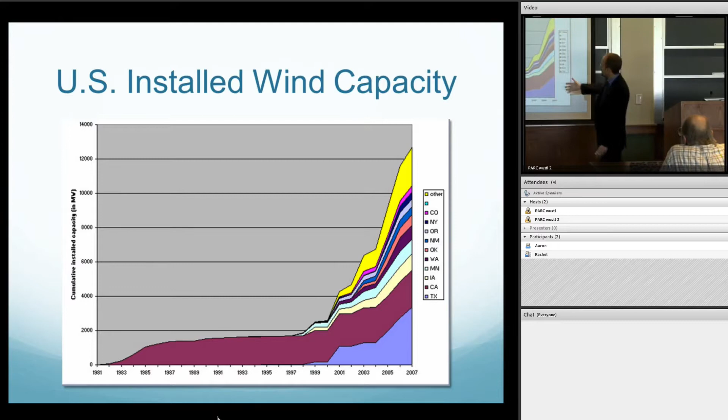We can break this out by where this power is being installed. The biggest portion of it up through 2007 actually came in Texas. This part before was mostly in California due to some subsidies in the 80s. There was a large installed base there. But a lot of the growth has come from Texas and then from various other places, mainly in the Midwest.

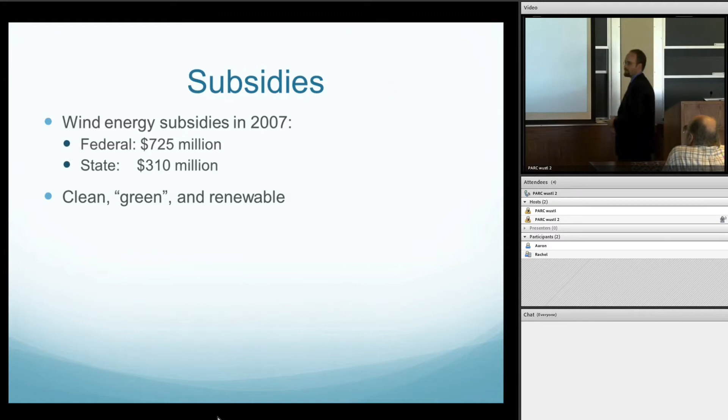Okay, so why have we had this growth? This is the question I first asked myself when I was a graduate student. I'm like, what's going on here? Why are we having this tremendous growth? It turns out that the answer is fairly simple. It's because we're paying people to put wind power in. We give them subsidies. In 2007, there was over $1 billion spent in wind energy subsidies alone. Why do we subsidize it? Because it's clean, green, and renewable. We like all of those things. To be more specific, it emits none of the traditional pollutants that we see from gas and coal-fired power plants like NOx, SO2, and carbon dioxide.

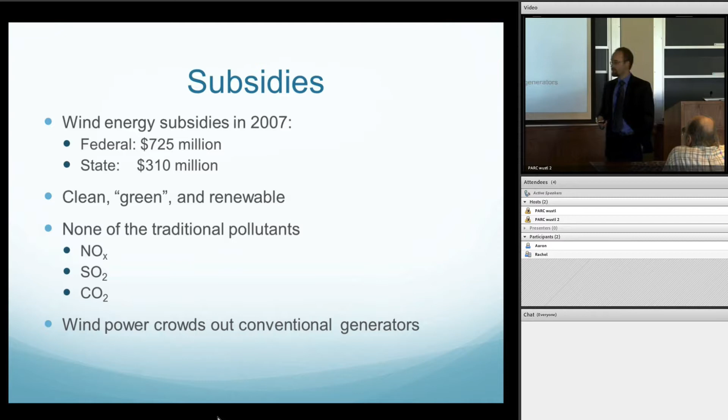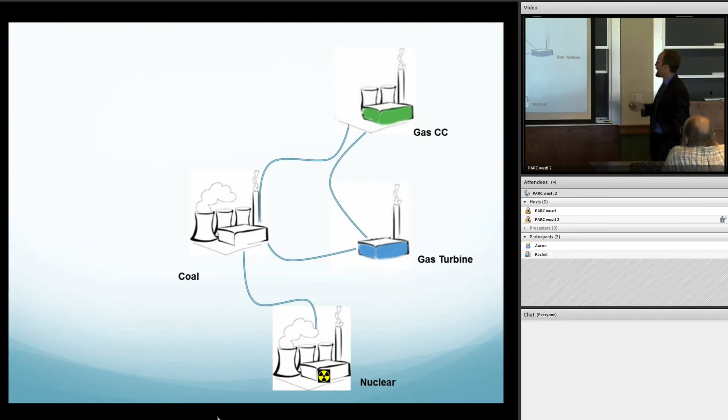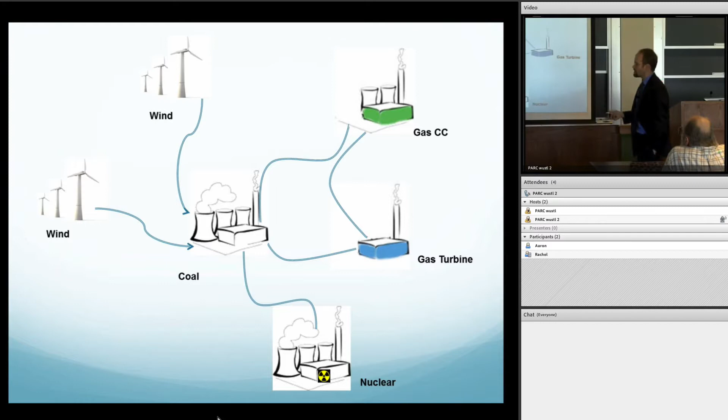And the idea is if we subsidize wind power, then other generators will have to produce less electricity. Right? In some sense, wind power is going to crowd out production from other energy sources. So suppose that we have a grid with different power producers on the grid. We have coal plants, we have gas turbines, we have gas combined cycle, we have nuclear. The idea is that wind is going to be built. It's going to produce electricity at certain times of the day that will flow over the electricity grid. Other types of generators will reduce their production.

Now, it turns out that these different types of generators have very different emissions profiles. For example, you take a coal plant, it emits over a ton of carbon dioxide for every megawatt hour of electricity it produces. It also emits significant amounts of sulfur dioxide and NOx. You compare that to a gas combined cycle generator where you have less than a ton of carbon dioxide per megawatt hour, very little sulfur dioxide, and also much less NOx being emitted. Then you have other types of gas turbines, which are somewhere in the middle. Here, this one is about 1,500 pounds per megawatt hour.

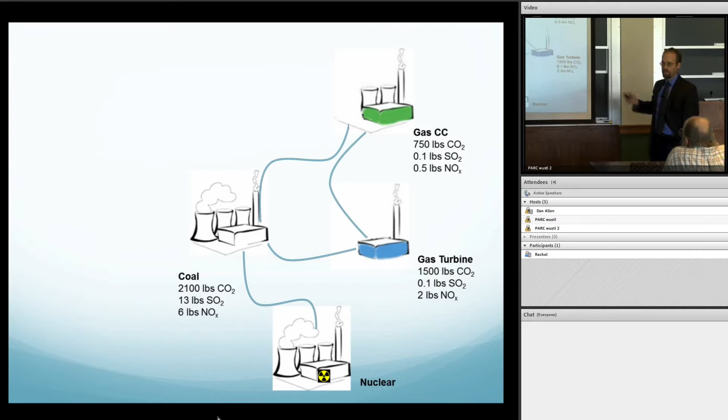Then, of course, you also have nuclear, which has its own set of environmental issues. But for the most part, and I'll explain a little bit later why, we're not going to be focusing on nuclear, primarily because it just doesn't respond to wind when wind produces electricity. It's not crowded out. Because the idea is we want to tell which of these generators are being crowded out. But we want to know what is the distribution of offsets in terms of electricity across these types of generators, because this is what will determine the environmental benefits of wind power.

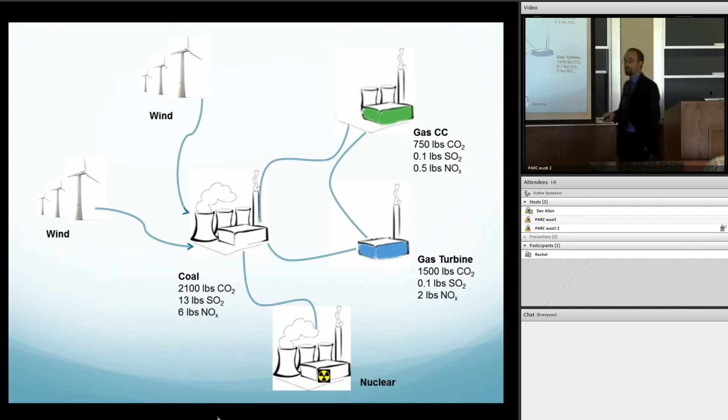This is the objective, to answer this question. What do subsidies buy environmentally? If we're spent... Yes. And if I don't, come back to me in a minute, okay?

So the question is, what do subsidies buy environmentally? If we're spending $1 billion a year on subsidies, I hope that we're getting something for it. So in particular, I want to look at the quantity of emissions offset by wind power. And also, I want to look at the value of those emissions. How valuable are those emissions that are offset? And this is going to depend on these generator-specific substitution parameters, or which generators ramp down their production when wind power comes online. That's a very short-run effect.

So if it's a windy day, there's lots of wind coming into the electricity grid, some generators are going to produce less electricity than they would have absent any wind power. So that's a short-run effect. There's also a long-run effect. So if I have a gigawatt of installed wind power, people may install different types of generators on the grid, or certain generators may enter or exit.

In this presentation today, I'm going to be focusing on the short-run effects. So given the landscape of the generators as they are, you introduce wind power, how are they going to change their production patterns? So the long-run question is very interesting, and perhaps more important for policy considerations than the short-run effect. But it's not going to be the focus of today's work. That's something I'm working on in the future.

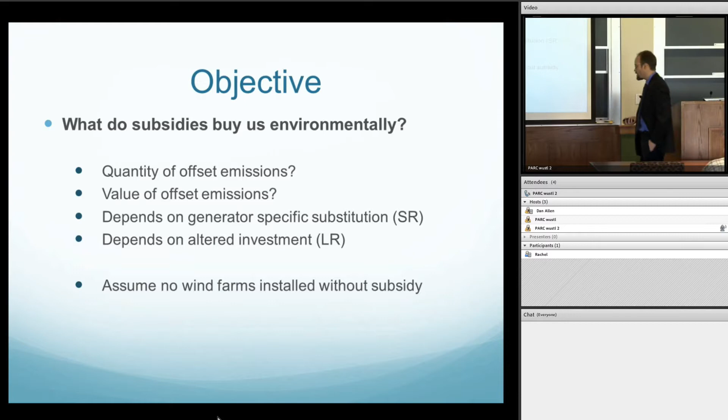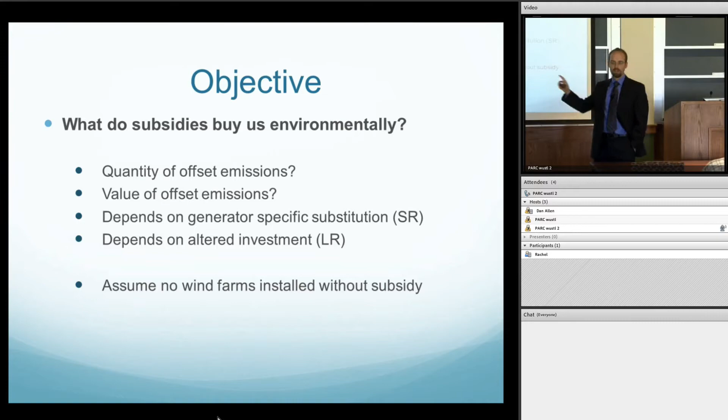Okay. So we're going to make an assumption here throughout the talk, and that is that we would have no wind farms without a subsidy. So if you were to take the subsidy to zero, or if we had never had a subsidy, you would see no new installed wind power aside from the wind power that was installed in the 1980s. So the subsidy that I'm looking at is the federal production tax credit, and that kicked in in 1992. That's the particular policy I'm looking at. So the subsidies for California that induced those investments are already gone. So I'm not looking at that particular question.

So wind power is very capital intensive. You spend all your money up front. You spend $1 million for a megawatt turbine. And after that, it's very low marginal cost. You have to pay maybe some leasing fees on land. You have to pay for maintenance. But as far as generators go, very, very low marginal cost because your fuel is free once you install it. Subsidies come in both federal and state flavors.

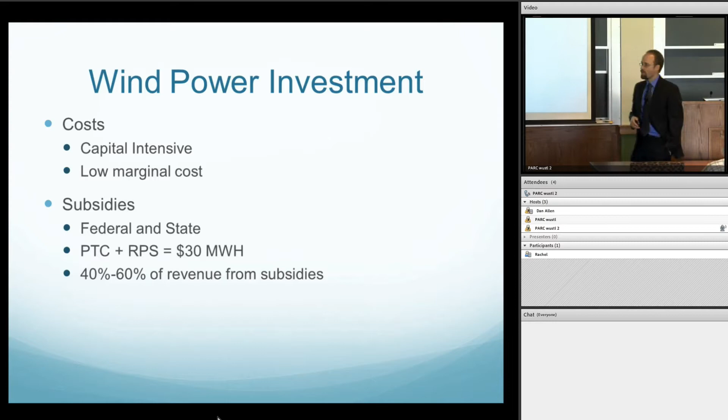So the federal flavor is the PTC, or production tax credit. And depending on the state, there may also be an RPS, a renewable portfolio standard. Those usually are paid out in some kind of environmental credit or renewable energy certificate. And between those two, for example, in the market that I'm looking at, Texas in this particular study, it's about $30 a megawatt hour that they're getting from subsidies.

So they get whatever they sell the electricity for, and then they get this $30 per megawatt hour payment. And it depends on how much they produce. So it's not an upfront subsidy. When you produce a unit of electricity, you get the subsidy. Right, so 40 to 60% of their revenue is coming from subsidies. So these subsidies are very, very important for their bottom line.

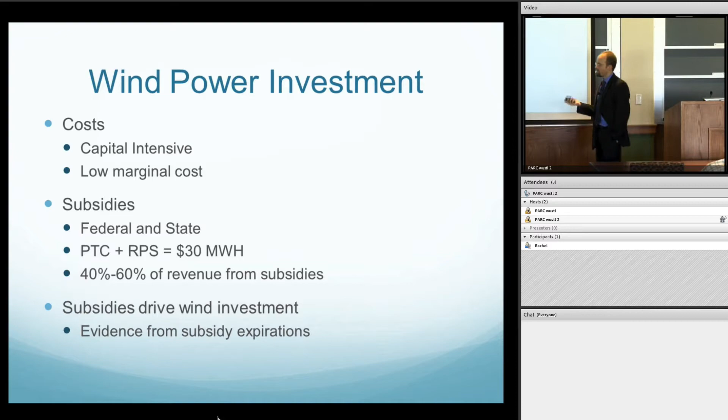And they're really driving wind investment, and you can see this from subsidy expirations. So here in 1999, we have our first spike in wind power. It turns out in the year 2000, those subsidies expired. So investment in new wind power plants dropped to almost zero. In 2001, those subsidies were reinstated retroactively.

So an important aspect of this is actually the production tax credit, not the renewable portfolio standards. The production tax credit accounts for about 2/3 of that $30 subsidy that I was showing earlier. Yep. Yes. Yes. Mm-hmm.

So it constitutes 40 to 60% of the revenue, right? So it's a really big part. It's no wonder that no one decided to invest here, and that people did decide to invest here.

An important aspect of the production tax credit is that once you receive the tax credit, you get it for 10 years. So there's no uncertainty. It's not like, well, I'm going to install this year and maybe I won't get the tax credit next year. It doesn't work that way. As long as the tax credit is active when I build my turbine, I get the tax credit for 10 years.

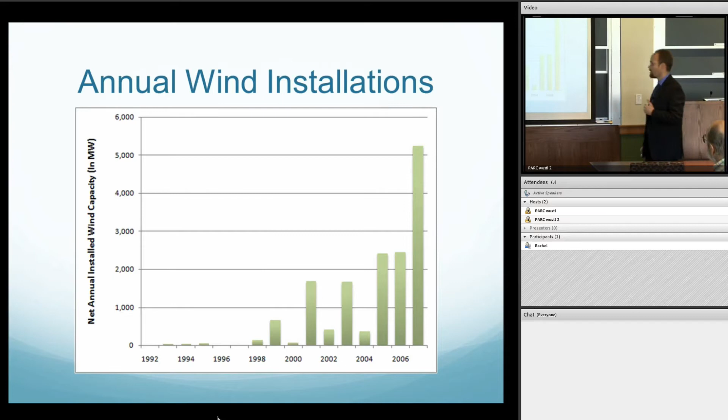Okay, so there's a number of ways we could approach looking at these short-run substitutions I was talking about. We could use an engineering model that's completely static. Some of the characteristics we want to incorporate, though, are dynamics. If I start up a generator in the morning, you have very short-run dynamics. It costs me something to start it up, and I may not want to shut it down again for a certain period of time. We also want to include location issues. If I'm close to wind power, maybe that affects me more than if I'm further away, depending on the configuration of the grid and where there is congestion. So I want to take into account location.

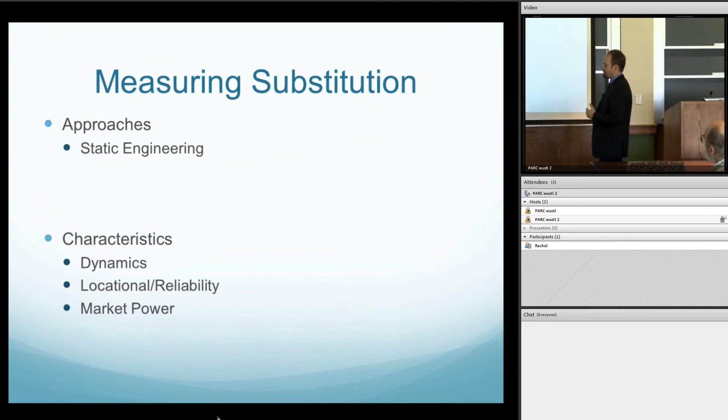We also want to take into account market power. This is important given the way that many markets have been restructured. If certain firms can exercise market power, we want to account for that. By market power, what I mean is that they're not pricing at cost. They're including some markup above their cost.

So another approach is to use an engineering model that incorporates dynamics. This will account for locational issues and dynamics, but not market power. What I'm going to be doing is taking an econometric approach, which accounts for dynamics, location, and market power. All three of those.

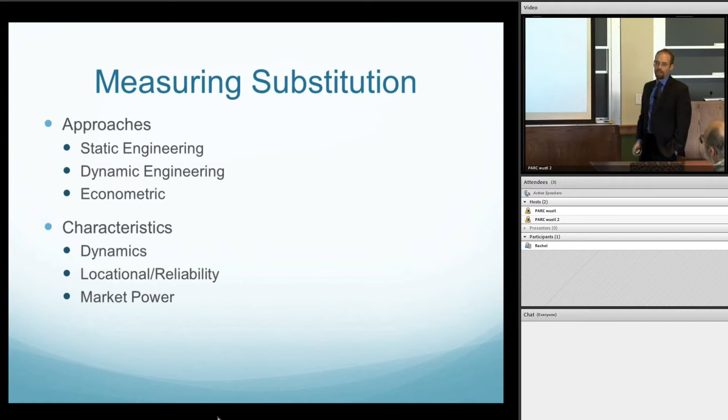And so the approach is to take quasi-experimental variation in the amount of electricity produced by wind turbines. This is just driven by weather. On a windy day, they can produce a lot of electricity. On a day that's not windy, they can't. And I'm using very fine scale data on generator output. I have wind output every 15 minutes, and I also have the output of every generator in the market every 15 minutes.

So this is going to allow me to identify generator-specific substitution patterns. So let me take a generator in West Texas that burns gas. It was built in the 1970s. It uses gas to produce steam to drive a turbine. Right? So what I'm going to actually get is a generator-specific substitution coefficient.

For every additional megawatt hour of wind power produced, on average, how much does this generator reduce its production? So it's very specific to each generator. In that sense, it's very, very flexible. There's no aggregation going on here. Right, so once I know which generators reduce their production when wind power comes online, then I'm going to use

EPA generator profiles. So the EPA tracks emissions from generators, and they can tell you what their emissions rate is. How much sulfur dioxide do they produce per megawatt hour? How much carbon dioxide do they produce per megawatt hour? How much NOx do they produce per megawatt hour? And I'm going to apply these generator profiles to the substitution coefficients I'm going to estimate to get offset emissions.

Sure. Yes. Yeah. Mm-hmm. Mm-hmm. Yes. Which people are you talking about?

Okay, so let's suppose I'm a generator that burns coal, and wind power increases. So what actually happens in this market? Well, the price of electricity drops. So there's a real-time market every 15 minutes. So wind power starts increasing. It may be anticipated. It may not be anticipated. That's sort of up for debate, how much of it's anticipated versus not.

So the price drops. And the price will continue to drop until some generator on the grid decides it's worth it for me to reduce my production. Now, maybe I contracted to provide electricity to someone else, but now the price is below my cost of production. So I can lower my production, buy power on the spot market to meet my contracts, and earn more money than if I had been producing electricity myself. So that's the mechanism by which this happens.

There is an explicit price process, right? And you'll see actually in Texas that these prices, not so much in the data I'm looking at from 2005 to 2007, but particularly in 2008, you have prices being very, very low in high production time periods for wind. We're talking negative, right? So the price is below zero. Now, why would the price be below zero? Very odd, right? And the reason is because they're getting this subsidy.

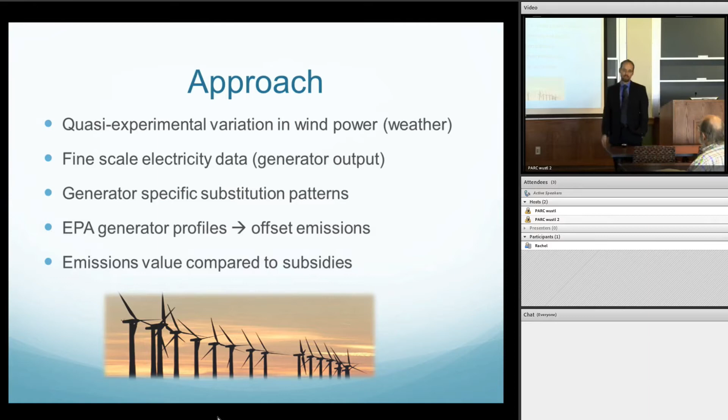Okay, so at least when I started this, and there's been much more work since, there's actually little empirical research on quantifying offsets. So there were quite a few engineering simulations, like should we build another gigawatt of wind power on our grid? What implications is that going to have for things like reliability? And they used engineering models to do that. They're very good at looking at things like reliability. And in the process, they're like, well, we can tell you what the emissions change will be.

This paper, on the other hand, actually uses data on operations to measure the environmental offsets. Right? So I'm actually looking at a grid with operating wind farms, and I'm using the actual observed behavior for generators in the market. And actually, this has spurred follow-up papers by Kaffine and Novan. They look at other grids in the United States. Like I said, I'm looking at the Texas electricity grid.

And they also answer slightly different questions, looking at, for example, heterogeneity by time of day. The parameter estimates I'm going to be showing you are on average, right? But we might care about when these emission offsets happen in the course of a day or in the course of a season or by level of demand, right? And so that's what these other papers do.

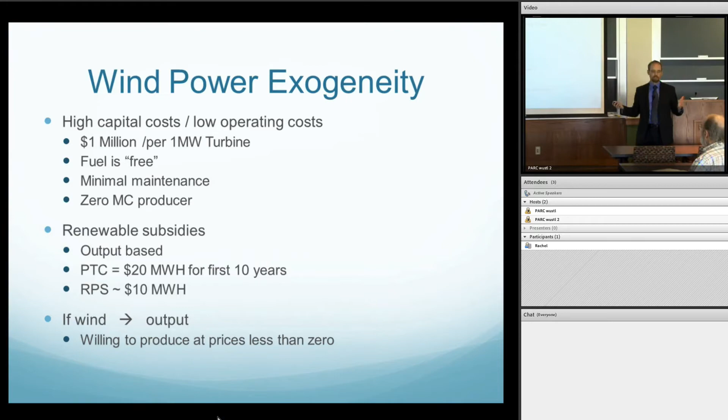And the result is whenever the wind is blowing, these guys are trying to milk every last ounce of energy they can out of wind power, with the exception of times when price is very, very, very low, and they're like, okay, it's minus $40 a megawatt hour, we're going to ramp back production. Or there may be certain events, like when you have a hurricane or something, you just have to turn it off. There's nothing you can do about it.

Okay, so we might think of an experimental model. Since this is exogenous, it is highly variable, where we just have the quantity production from a given generator on the left-hand side, and then wind on the right-hand side. This is a very, very simple model, right? But the problem is that this isn't an experiment. It's quasi-experimental in that wind is not completely random. So it follows some patterns.

Also, this is not unique to Texas, but pretty much all through what they call the wind belt, which is the Midwest in the U.S. We have this kind of production pattern. This is very common for actually any land-based wind farm. Offshore wind farms are different. They have a production pattern that's more similar to demand.

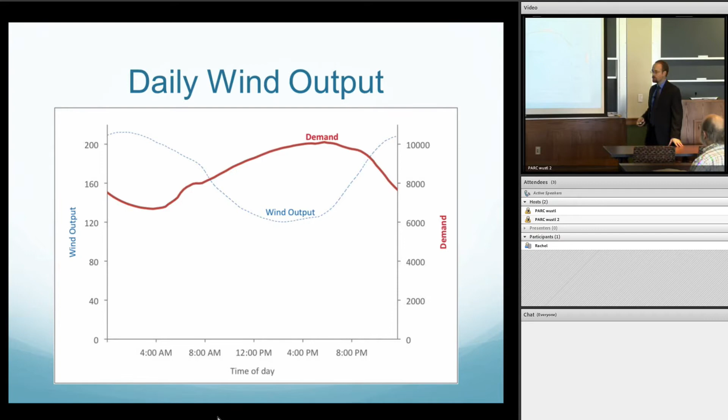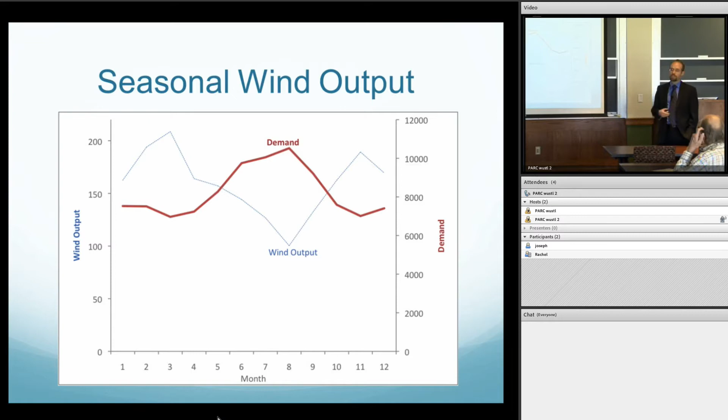Okay. But it doesn't stop there. We also have seasonal variations. So wind produces most of its power in the spring and in the fall, which is exactly when we don't have high demand. We have high demand in the summer and in the winter. In this case, for Texas, it's particularly in the summer because it's a lot of air conditioning. But that's true throughout the US. The peak demand times are always in the summer because even in Minnesota, they use air conditioning.

So the grid I'm going to be looking at is the Texas Interconnection. It's been a restructured market since 2001. There's about 22 million people here. It has a relatively large share of wind power. So in 2007, 5% of its capacity was wind, which for the US is quite high.

So the data I have is generator output every 15 minutes. So I have 332 generators I'm looking at, plus the wind farms. I have it for 2 years. I also have DC ties. These are the transmission of electricity outside the grid. So I do see how much electricity goes outside the grid. I just don't know what it does once it leaves or where it comes from if it comes in.

There's 2 DC ties. One is to the Southwest Power Pool, and one is, I forget the name of it, but it's the southern grid. So it is point to point. It's just transferring power between it and another interconnection.

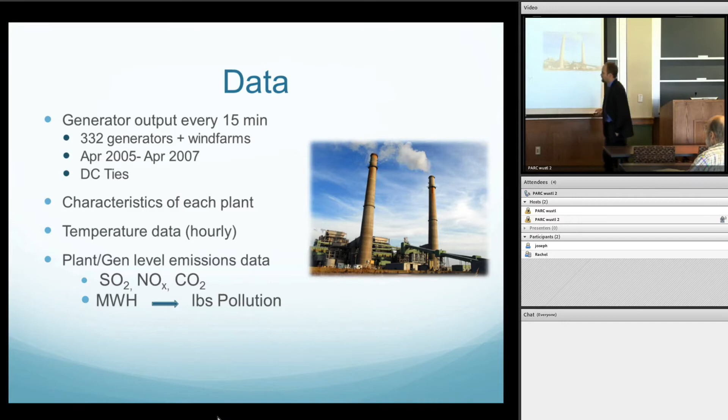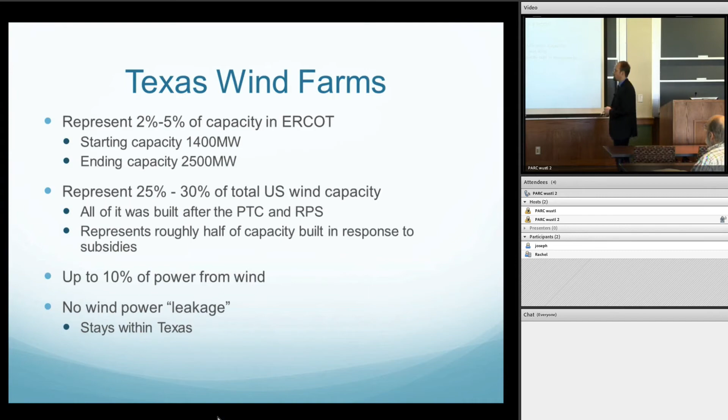Okay. So interestingly, this change in capacity in ERCOT represents 25 to 30% of the total US wind capacity built over this period. So even though I'm looking at Texas, let me rephrase that. It represents roughly half of the capacity built in response to subsidies, which is 25 to 30% of total US wind capacity. So Texas is a huge player in wind in the US. So at any given time, up to 10% of power on the grid is coming from wind. Now that's even more, and it all stays within Texas.

I'm going to kind of go through this quickly. Many of you probably are not worried about this, but economists worry about demand and supply, what's endogenous, what's exogenous, what's determining what. And in electricity, the demand for electricity is actually not determined by wholesale prices. That's because consumers like you and I, and even to a large extent industrial users, are not exposed to wholesale prices in real time, right? So I get some price, maybe it's a price for the month, maybe my price changes every month, that's fine. But for that given month, I have no incentive to increase my consumption when prices are low or decrease it when prices are high. I just face some constant price.

So I'm modeling demand as a function of shocks, Z. So this might be the weather, it might be when I wake up, it might be when I go to bed, and of some constant price that doesn't depend on T, my 15-minute time period.

So the wind is going to affect output through the price, as we mentioned before. I'm not going to model the price component of this. Rather, I'm going to use a reduced form model to look at the impact of wind on emissions or on output directly. So I could go wind on prices, prices on output. But instead, it's more efficient to go directly from wind to output. And I'm going to exploit the exogeneity of wind power to do that: the fact that they don't have control over their available fuel, they're a low-cost producer, and they cannot store their fuel or their output.

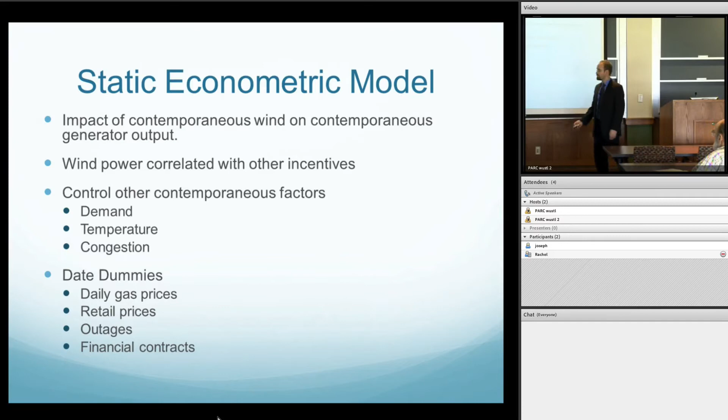Okay, so this is what the estimating equation would look like. I have quantity on the left-hand side. I have wind and wind squared. It's just a simple polynomial expansion of wind to allow for nonlinearities, which I think may be in the model. You have z, which are all those controls like demand and temperature, and then you have the date dummies. And there's going to be a separate regression for each generator on the grid.

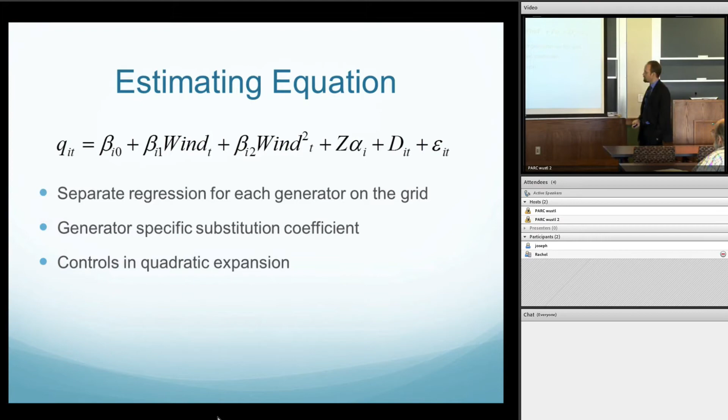So I had 332 generators. That's 332 regressions I'm going to be running. And I'm going to get generator-specific substitution coefficients, which are the beta 1 and the beta 2 in my model. And I also do a quadratic expansion for the controls to allow for nonlinearities there. This is a nonlinear system. Okay, this is the estimation. Not that interesting. Okay, so these are the results from a static model.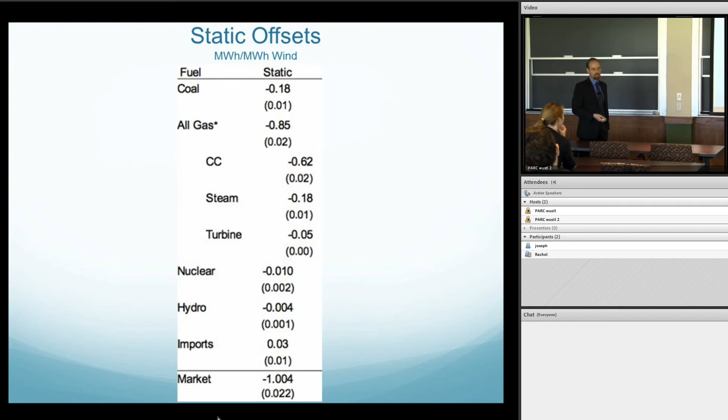So the basic idea is I do want to allow for some nonlinearity. I also want a fairly parsimonious specification so that the interpretation of the coefficients is straightforward. I don't see any theoretical reason why you could rule out, for example, having more polynomials in there. Could, yeah.

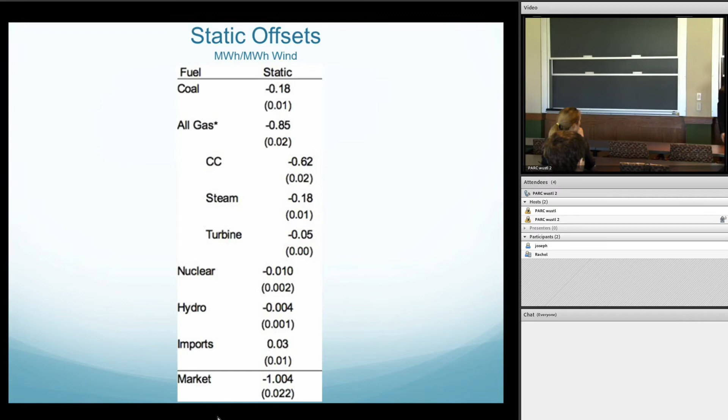Okay, so if we just look at the static model, and by static, I mean that it's just the output right now and the wind power right now that matters in this time period. You see that coal actually accounts for a large fraction of the substitution. For every megawatt hour of wind, about 0.18 of that 1 megawatt comes from coal. Coal plants reduce their production. This is a little counterintuitive because although wind power does produce more electricity at night, coal is more likely to be on the margin then. Gas accounts for 85% of the substitution. Nuclear accounts for a very, very small portion, as do imports and hydro; there's just a couple of hydro facilities, they're very small.

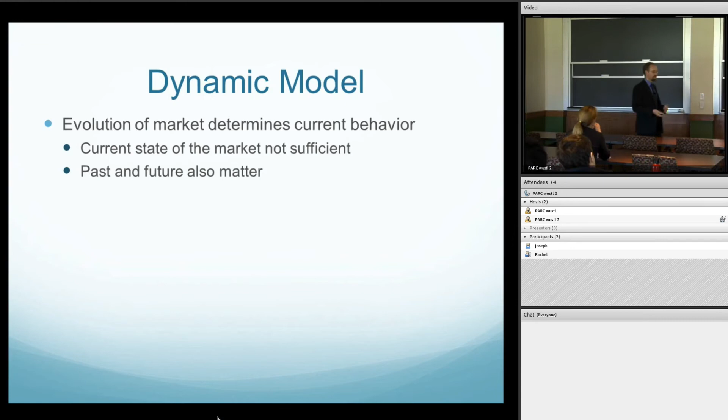So the problem with a static model is that the evolution of the market determines current behavior. It's not just how much wind is being produced now, it's how much wind I expect to be produced in the future. And it's not just what I'm operating at now, it's how long I expect to continue operating in the future. So these firms are forward-looking. They know it's going to be costly to turn on and off their generators, and so they're going to take those things into account. So the current state of the market is not going to be sufficient. The past and the future are also going to matter.

So the way that firms optimize in this market is they have information 2 hours prior to operation to decide what to bid. This is all happening through bids. Firms submit bids into the market. There's an auction, and they say, okay, you win the bids, you produce this electricity. And that happens 2 hours prior to the time when they have to produce the electricity, every 15 minutes. So they're going to solve a complicated dynamic programming problem and choose some optimal policy 2 hours before production.

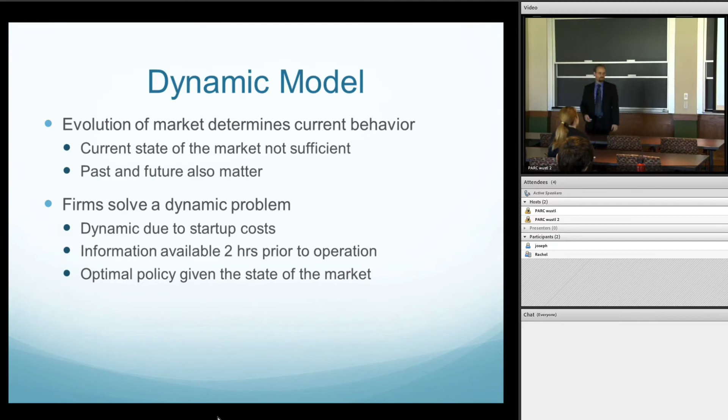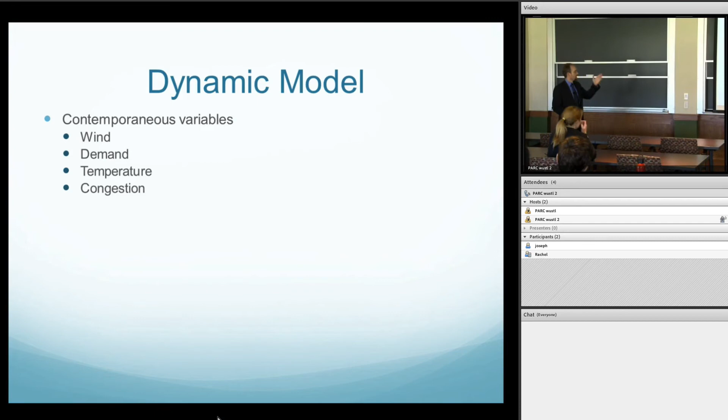So I'm going to include controls for the firm's information set into the model. I have the contemporaneous variables, and then I'm going to have these lagged variables, lagged 9 to 100 periods. I'm going to have wind power lagged, demand lagged, temperature lagged, congestion lagged. I'm also going to have the operating state of other generators lagged 2 hours. So if I care about who's operating when it's my turn to submit a bid, I might care that you're operating or you're not operating. So I include that information in there also. Yep.

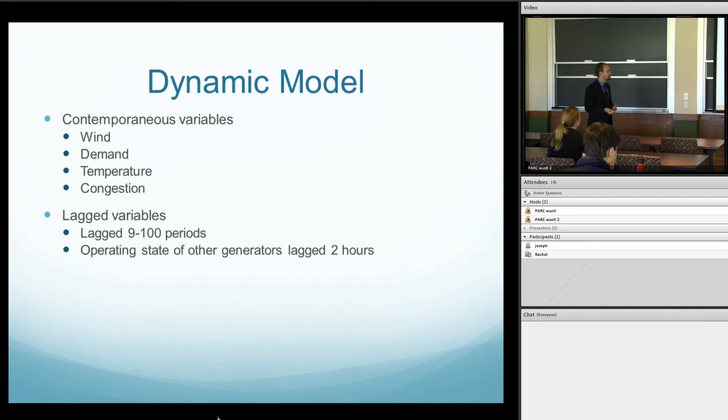Okay, so this is the dynamic model. So again, I have the same sort of estimation, right? And then here are the dynamic results and the static results. So what you see first of all, right off the bat with coal, if you look at a static model, you think that coal really is impacted by wind. If you look at a dynamic setting, actually that's not the case anymore. So coal accounts for a very small fraction, and statistically it's not even significant, of offsets from wind power. And gas now accounts for 92% of all offsets.

So this actually corresponds with maybe what our priors were about who should be reducing production when wind power comes online. Right, we think it would probably be mostly gas. Interestingly, though, a lot of it comes from combined cycle generators, which are the most efficient generators on the grid. So over half of the offsets come from these combined cycle generators. Turbines, those are the easiest ones to start up and shut down, account for 7%. And steam, which are a little bit lower cost than turbines but still relatively high cost, account for 32% of the changes in production.

All right, and then you have, again, very small fractions of hydro and nuclear, and nuclear is still statistically significant on the margin, but only barely. Imports now go from being positive to negative, so saying that we export about 7% of the electricity that's coming from wind to outside the grid. So accounting for the fact that there are these dynamics is important when it comes to estimation.

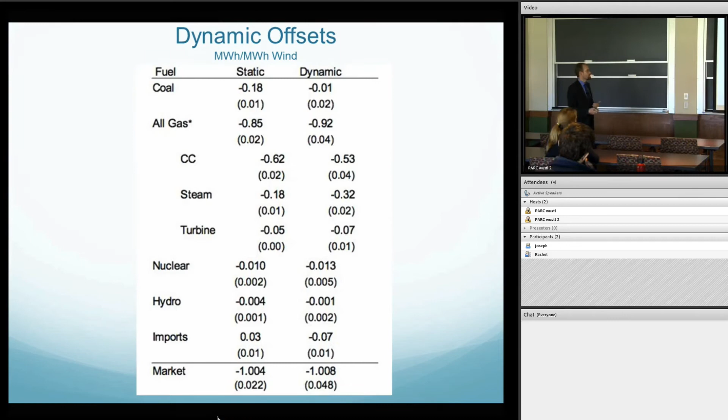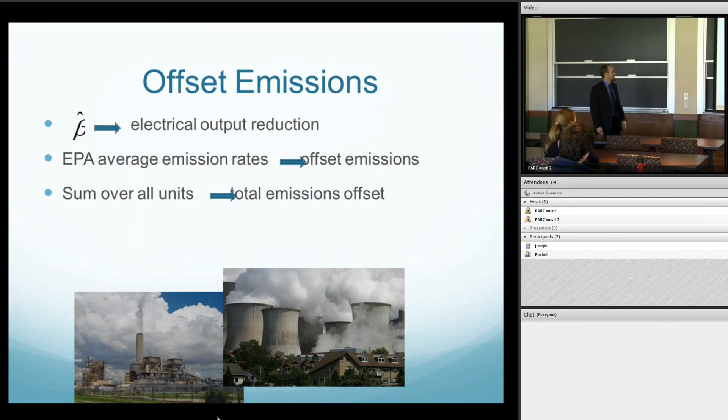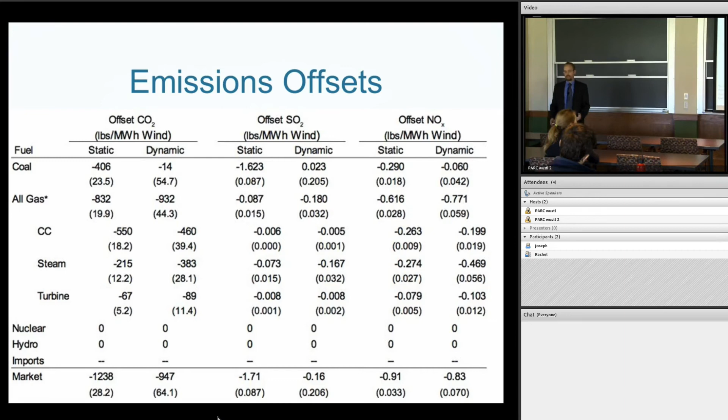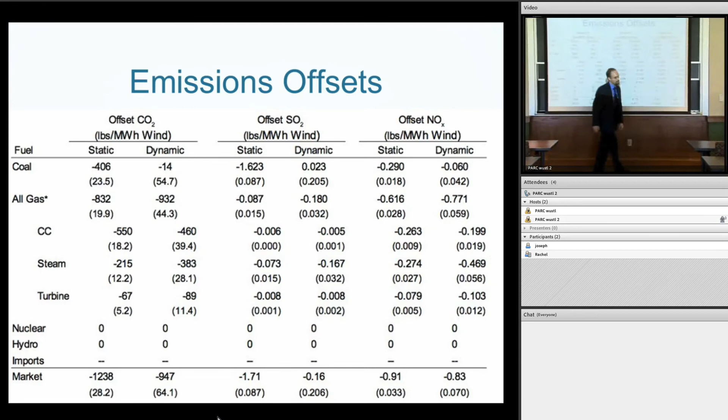So you can see that for every megawatt hour of electricity that is produced, about 947 pounds of carbon dioxide are offset. So less than a ton of carbon dioxide. Very small amounts of sulfur dioxide are offset. You notice that in the static model, we have significant amounts of sulfur dioxide being offset due to the fact that 18% of the production was offset from coal in the static model. And then we have less than a pound of NOx being offset from this production. Okay.

So if we were to apply these parameters to the whole time period, and there's probably some heterogeneity over this time period, then this is what we would get: about 5 million pounds of carbon dioxide, very little sulfur dioxide, and a little bit of NOx. And as a percent of total emissions, you see that it's under 2%, whereas wind production is just about at 2%. So wind offsets emissions that are less than the average emissions profile in ERCOT, right? Because it's offsetting these relatively clean generators in Texas.

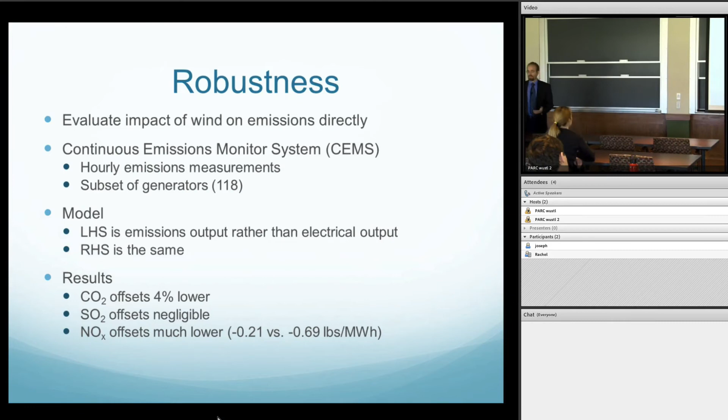Okay, so I do some robustness checks, which I'm going to kind of skip through. Basically, there is some continuous data on emissions from generators. That is, in real time, every hour, they measure the emissions output. But it's not for the whole set of generators, it's just for a subset of them. So I look at the subset of those generators, and I find that for CO2 and SO2, the offsets are not statistically different. For NOx, the offsets are much lower. So we actually get even lower offsets for NOx when we look at real-time emissions as opposed to the average emission rates, at least for this subset of generators.

Okay, so how are we going to value these emissions? So let's suppose that these are the emissions that are being offset. For unregulated emissions like carbon dioxide, these are real reductions in carbon dioxide. Right? This is carbon dioxide that would have gone into the atmosphere that now is not. And we can use estimates of marginal damage costs for carbon dioxide to value that.

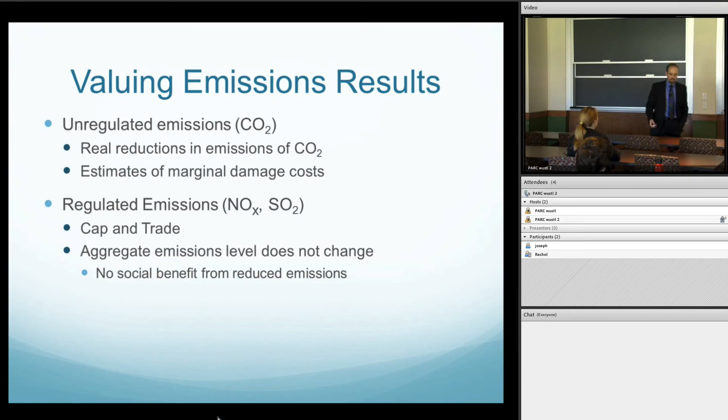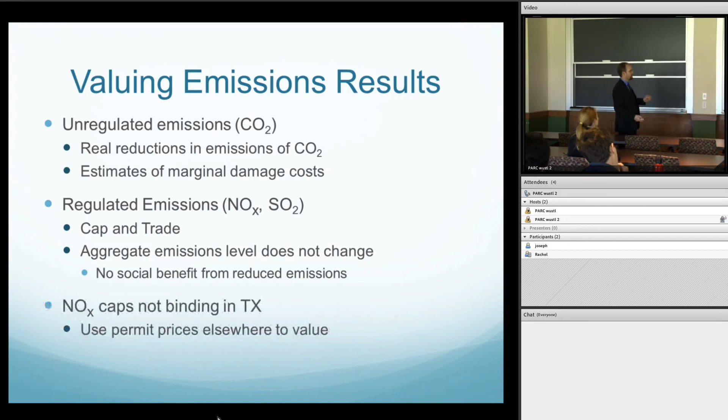For regulated emissions, such as NOx and SO2, these particular emissions are regulated under cap and trade systems. So if I save some emissions now by not producing, I can keep hold of my emission certificates for later. So there's no change in the aggregate level of emissions. That is, there's no social benefit from reduced emissions unless the new distribution of emissions over time is different. So if now we're emitting at night instead of during the day, maybe that's beneficial to people. Or if we're emitting during the day rather than at night, maybe that's worse for people. But I'm not looking at that. I don't have the information to look at that kind of heterogeneity.

For NOx, though, it turns out that the NOx caps are not binding in Texas. So even though there is a cap and trade system, it basically doesn't matter because the permits are basically free, right? Because I'm not hitting the cap. So there's no penalty for me emitting more in Texas. This is particular to Texas. This is not true, for example, on the East Coast.

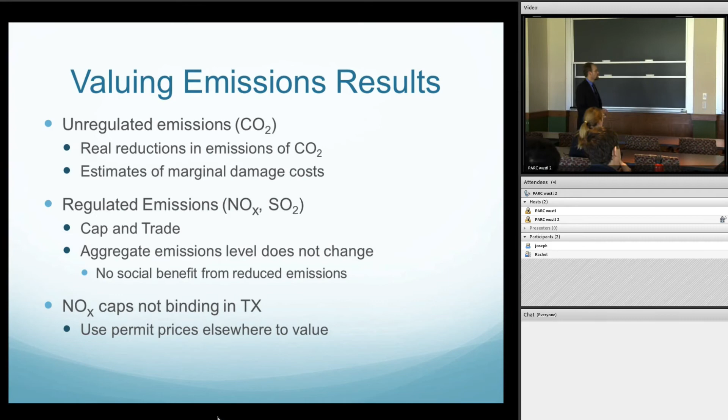So, yes, they do. Depends on what day you ask. It goes anywhere from $40 to 0. So in the first stage of the ETS, in the beginning, it was in the $40 range, and then about halfway through, it crashed and went to 0 when they realized that they gave out too many permits. And now the second stage is in place. I'm not sure what they're trading at now. I'm guessing it's around the $30 range, but I don't know for sure. I haven't checked that in a while.

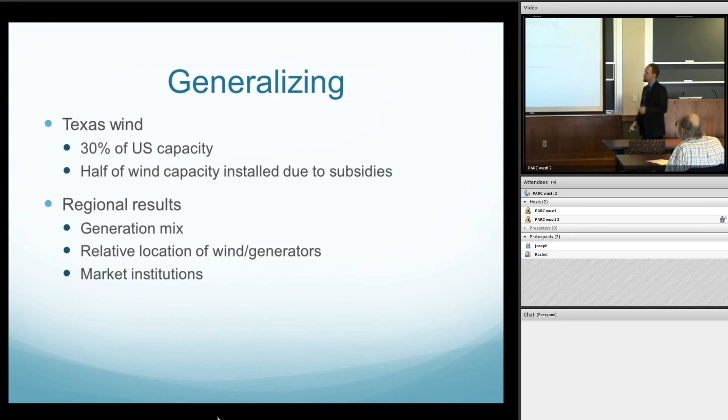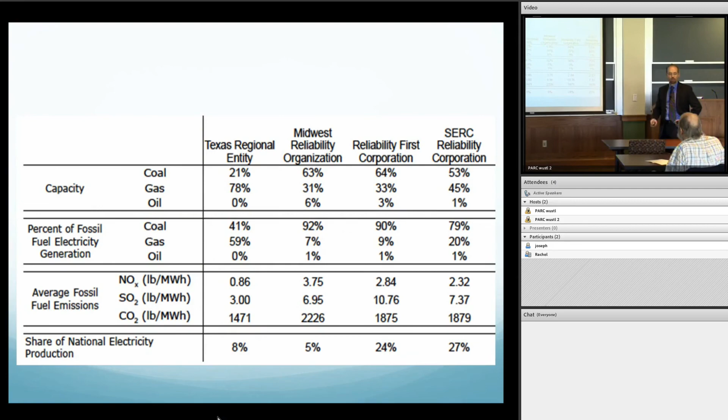So I'm out of time. The question is, can we generalize this? Even if we can't generalize it, half of the wind capacity installed due to subsidies comes from Texas. So it still gives us an idea of what we're getting for half of our subsidies. And you can look at regional results and compare the generation mix in Texas to other places in the US. Texas turns out to be one of the cleaner grids in the US, right? So in some sense, this is more of a lower bound on the emissions offset that we might get in other areas of the US. But it's a little hard to generalize.

Okay. Go directly to conclusion. Right, so this research evaluates a large part of a $1 billion a year subsidy, looking at half of the capacity installed due to those subsidies. And it may be a lower bound on returns elsewhere. And you can do this because you have this really interesting variation in wind. Right? You have weather. Weather is a great instrument for estimation.

And the results show that the value of the offsets is almost completely driven by carbon dioxide emissions. Right? And if you believe that $42 is an appropriate price for carbon dioxide, and many people do believe that, then you could say, well, it's not $500 a ton, right? It's $42 a ton. So for plausible values for CO2, the subsidies might be able to be justified.

Okay. Any questions? I'll take applause. That works. That works. Questions? Mm-hmm. Mm-hmm.